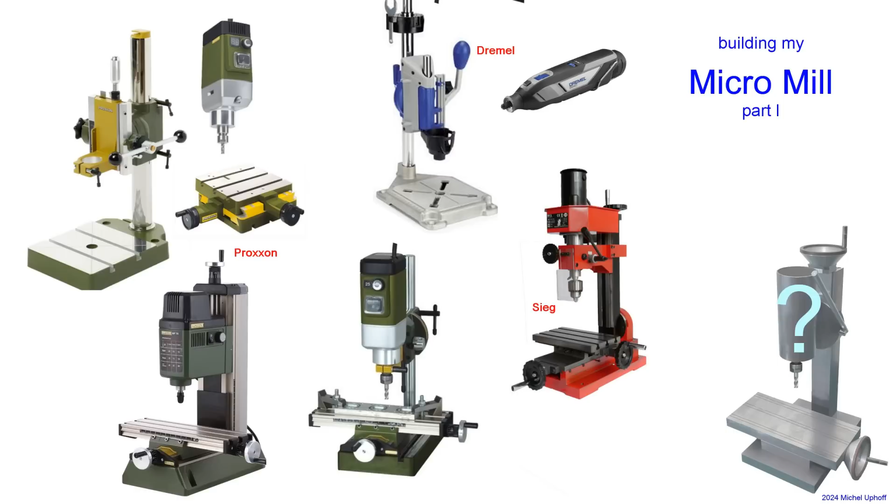In this new series of videos, I will be reporting on the development and construction of a much-needed micromill, a larger project with potentially many pitfalls and obstacles. I hope you enjoy it.

This happens to me so often. I have to drill a hole of 0.5 mm diameter or work with a 2 mm carbide end mill. And then it is quite a struggle with that relatively clumsy big mini mill with a much too low RPM. Fortunately, it still works well here. But oh, how careful you have to be with the feed rate at such a much too low speed.

The 4000 RPM of my FF500 is much too slow for these tasks. 20,000 is more appropriate. This graph plots horizontally the diameter of a high-speed steel milling cutter or drill, and on the y-axis, the corresponding RPM for various materials. As we will see later, this is an important graph when choosing a micro-milling machine.

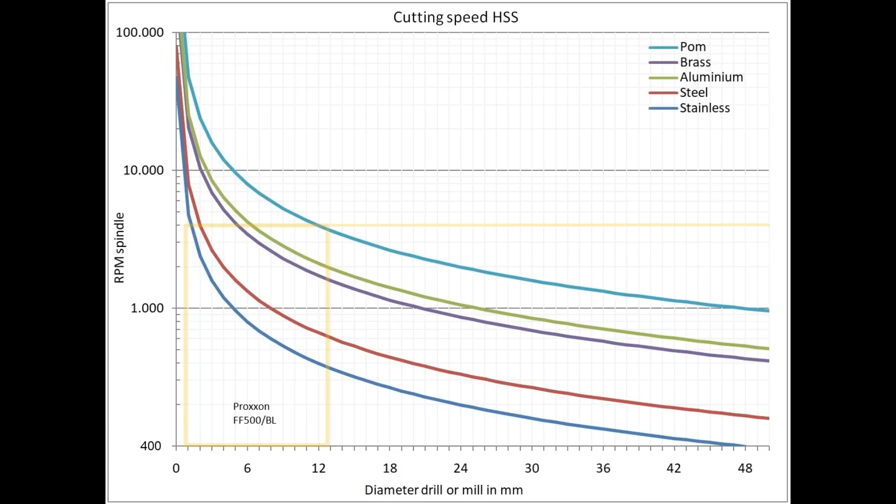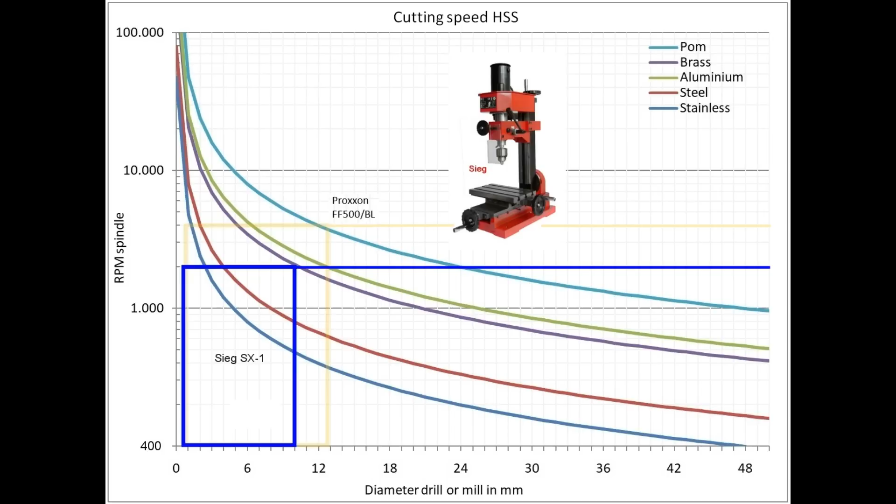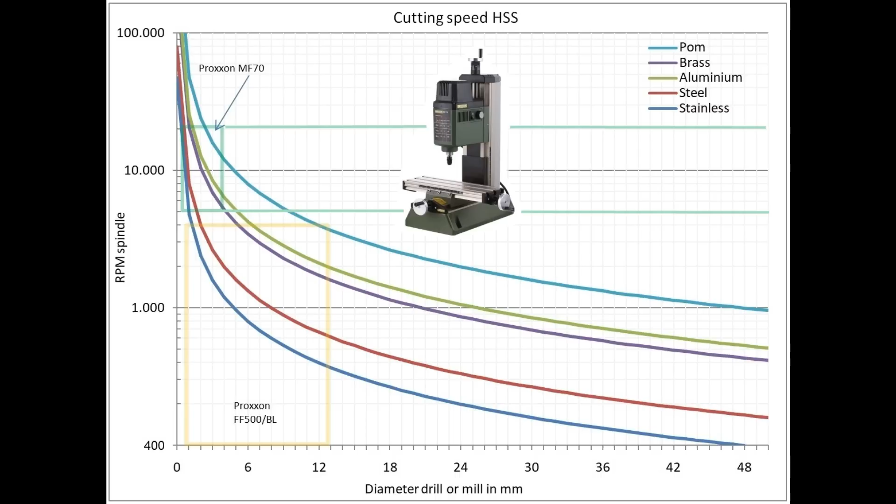So let me look for a micromill that complements my Proxxon as best as possible. This Sieg adds nothing and has a worryingly low maximum RPM for such a small machine. Of course, you can't avoid brands like Dremel and Proxxon. However, the Dremels are unsuitable for precise drilling and milling work. This MF70 from Proxxon was designed for just that. But the working range is so limited with 5,000 to 20,000 RPM and 0 to 3.2 mm clamping range that it doesn't have my preference.

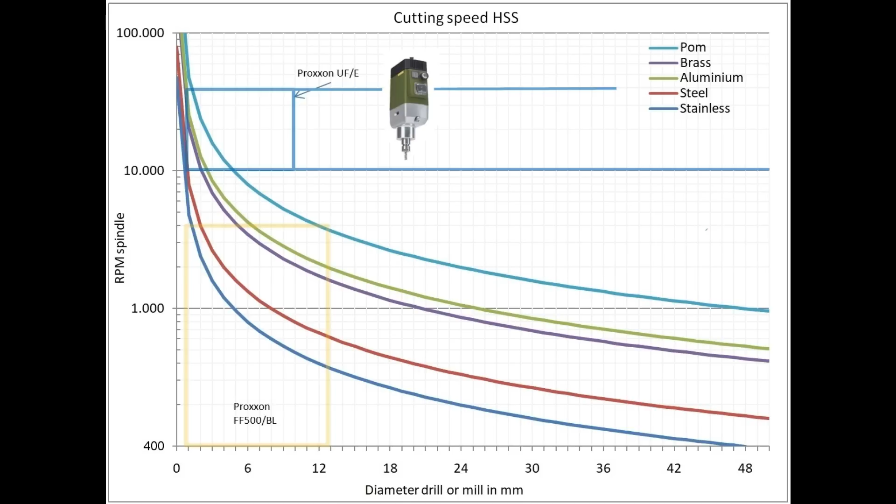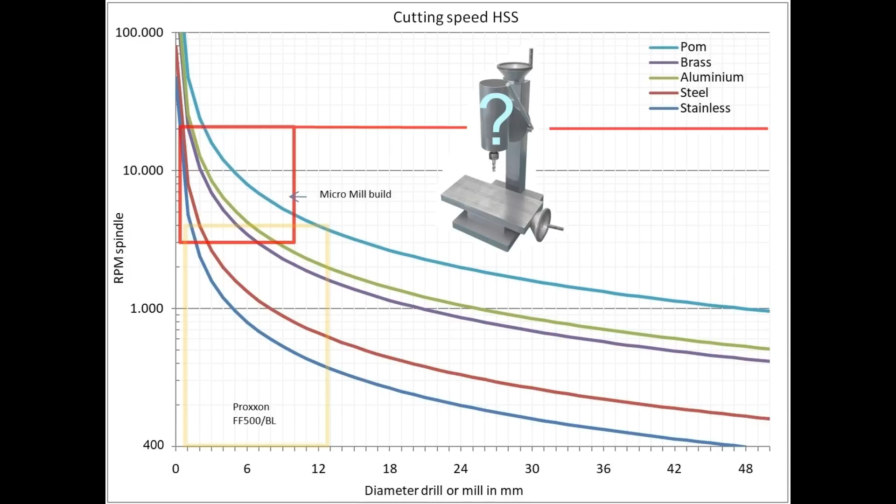This spindle from Proxxon has, in contrast to the MF70, a strong brushless motor with high torque at low speeds, but it is really a mystery to me why the lowest speed is at no less than 10,000 RPM. That limits the usability enormously in my opinion. This could be a nice additional work area. Anything between, say, 0.5 mm and 10 mm could be processed properly with such a machine, and the machine would then seamlessly complement my FF500.

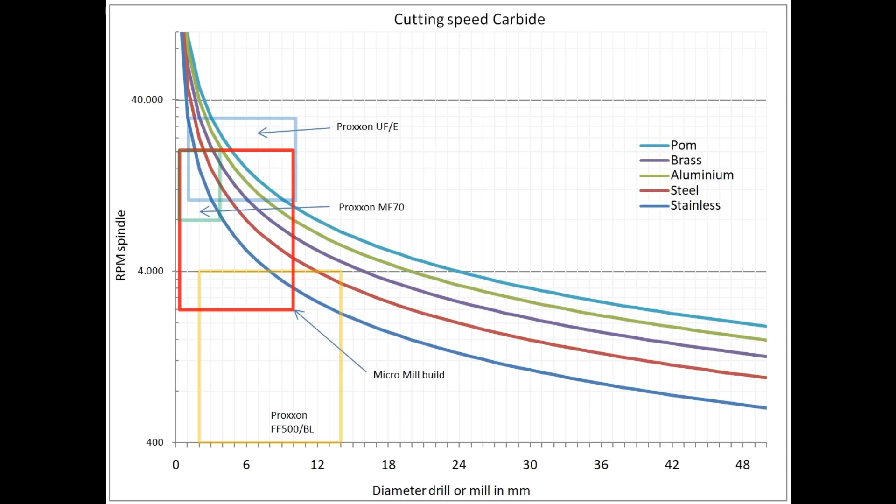I want it all. The Sieg is out of the question. With far too low RPM, it is not a real micromill. The Dremel meets almost none of the requirements. There is only a simple drill stand available for it. The MF70 has a cheap motor with far too little power at low speed, and does not meet other requirements like a swivel head either.

The UF/E can be supplemented with a column and a cross table, but that ridiculously high minimum speed and the lack of a vertical fine adjustment do not make me enthusiastic. Also, this machine with a column of 20 mm solid steel cannot really be called rigid. It flexes like crazy. And unfortunately, the much more expensive, sturdier combination from Proxxon does not really meet the requirements either. The same motor is used, so the same 10,000 RPM problem.

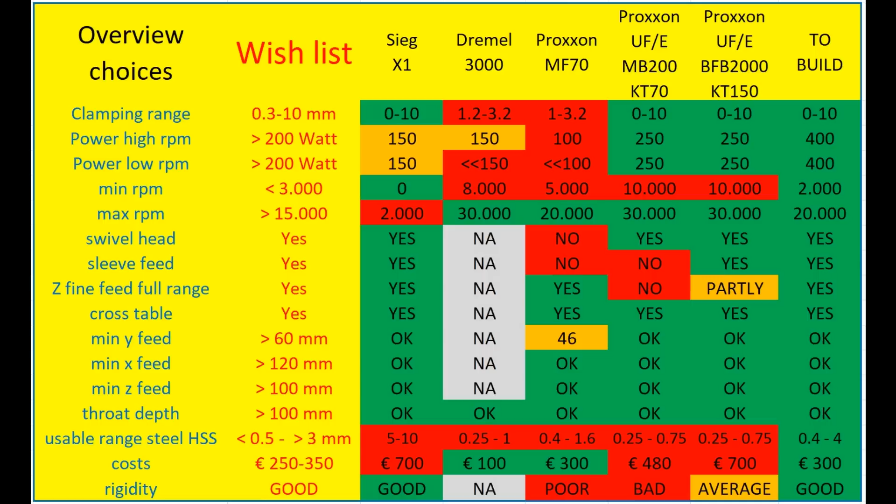The rigidity has been set by me to average because of a 43 mm hollow tube as a column. This column is about 3 times as flexible as the one planned in my own construction. Finally, the costs. I think I will manage to keep the entire budget for self-construction under €300.

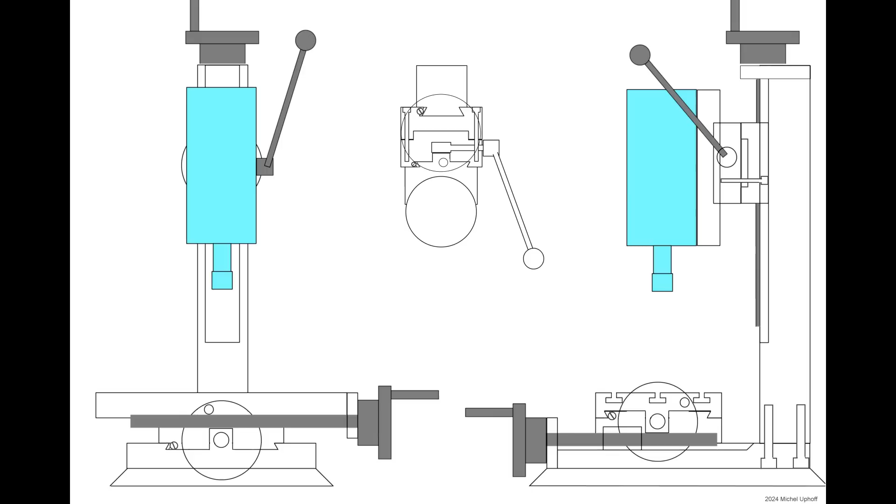Here is a first sketch of what I have in mind. Everything will be made of steel, preferably free-cutting steel. But this is just a first rough draft. During the construction, I will certainly make adjustments and add many details. I will probably also make a few mistakes and have to jump through some hoops. We will see. Let's get started.

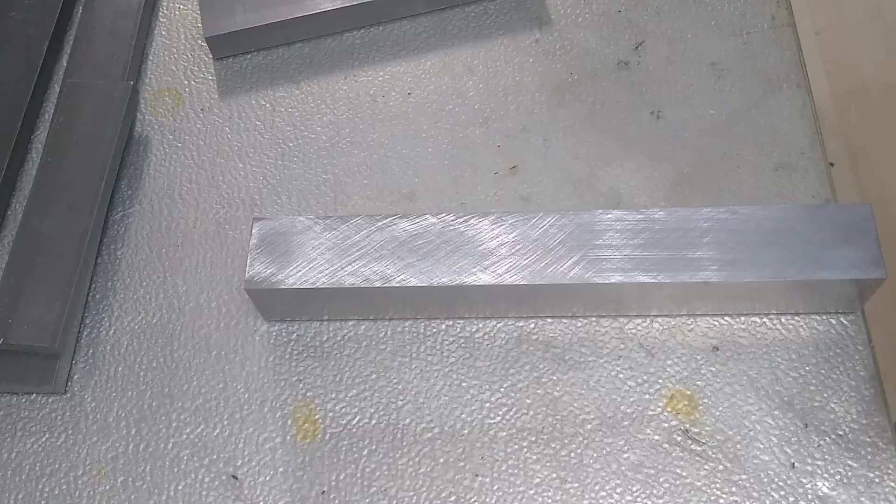Cold rolled steel, like this, has the advantage that it is fairly accurate to size, but it is less suitable for machining. We will see why later. For now, it is important that I have at least two reliable reference surfaces, which are completely perpendicular to each other. Of course, this slender milling cutter bends a little, even with very shallow cutting depth. That is why I will later take away 1/10 of a millimeter or so in several passes with a T-slot mill.

The material for the column is nicely square and equally thick everywhere, but the surfaces are very slightly convex. The reference surface is made very flat with cross strokes from a good file.

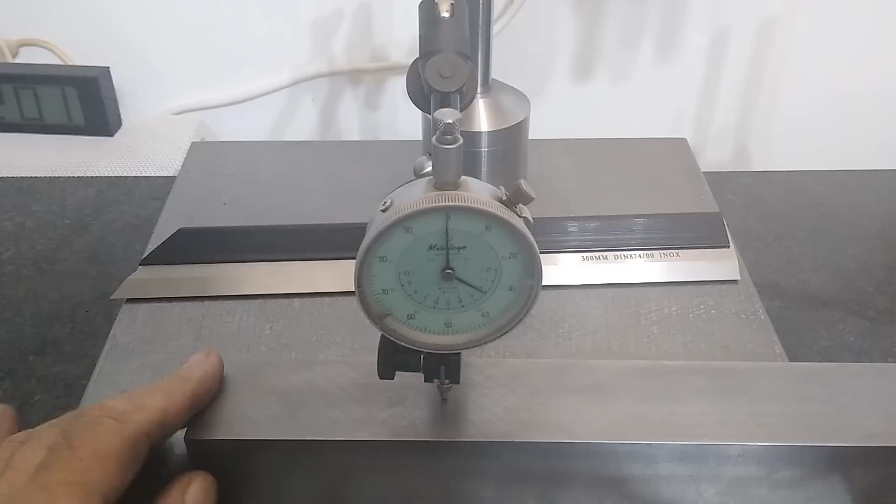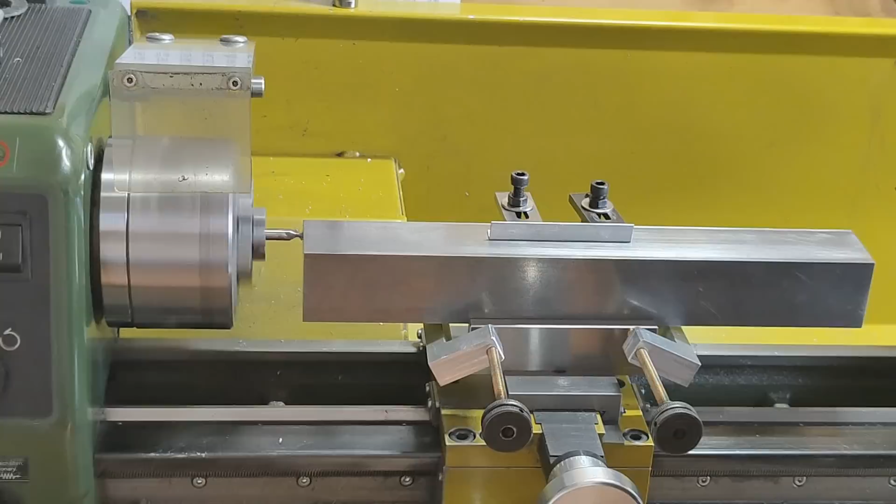How do you accurately drill screw holes in a column that is way too long for the mill? Once again, the lathe comes to the rescue.

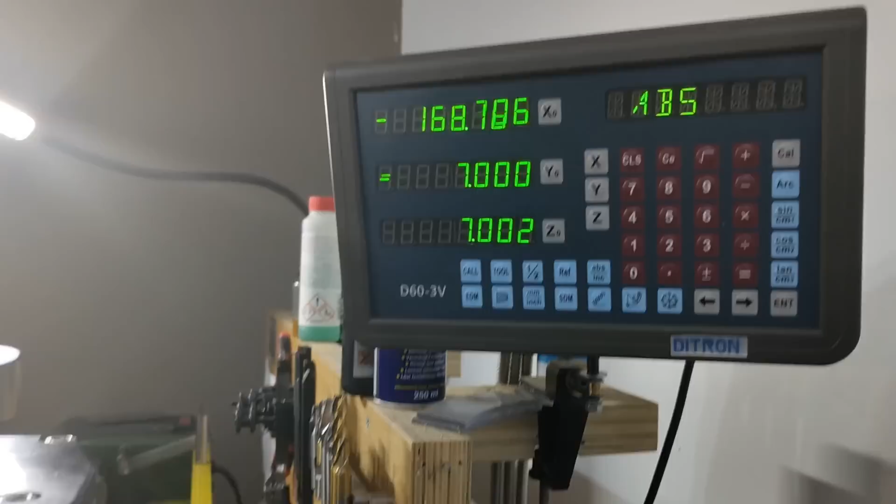I have a precision furnace that can anneal steel, but these larger pieces won't fit in it. So I'm going to have to get a little creative here. This is the tricky part. That cold rolled steel has been given a lot of tension during rolling. As long as it is not significantly processed afterwards, it does not cause any problems. But especially with significant processing on only one side, the steel will bend and the side where most of the material has been removed will bulge.

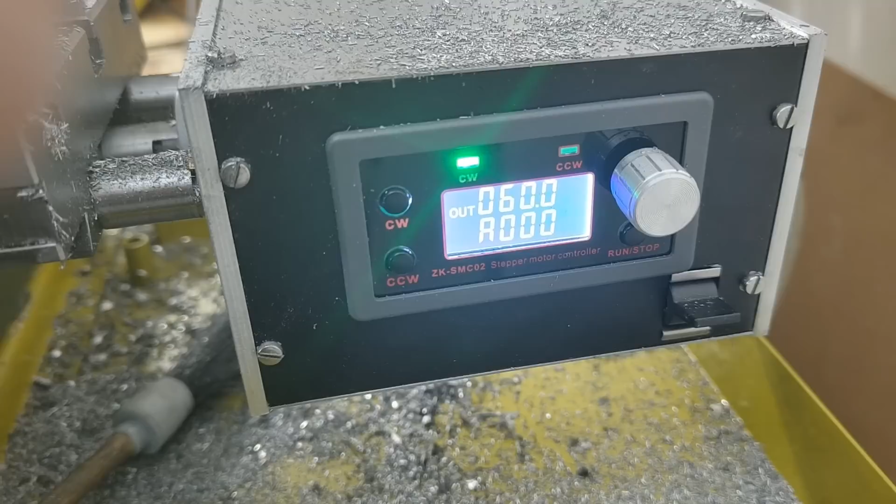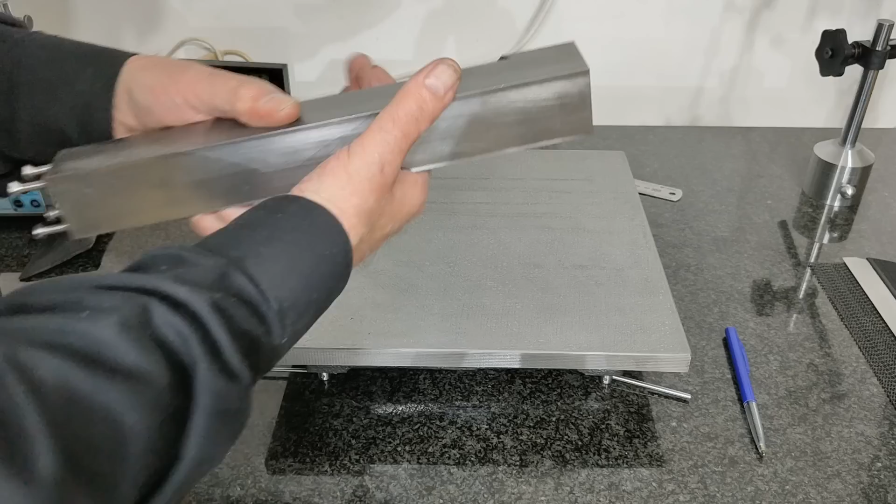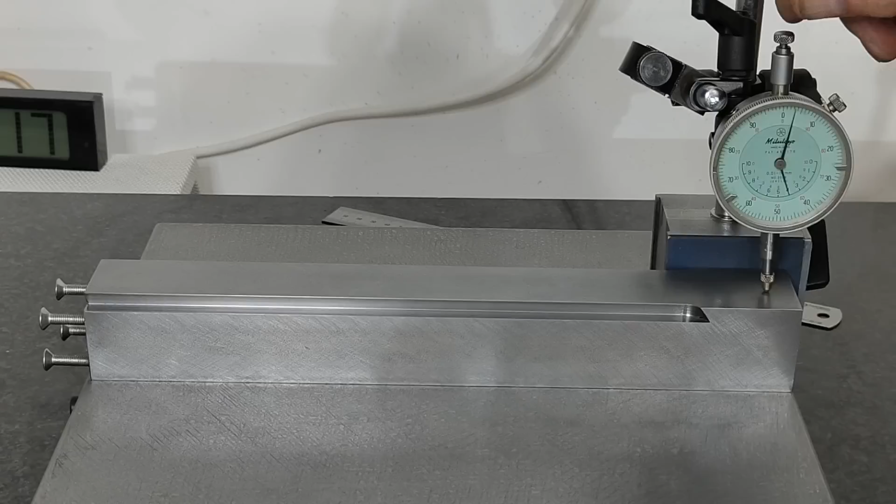And with the milling of two 8 mm deep dovetails over almost the entire length and on only one side, I can bet on the reference plane being warped. That is why I put the column for the last pass between vices, hopefully without adding tension to that warped surface. Indeed, that is convex. The steel has risen 45 microns in the middle. But fortunately, the trick of reclamping without tension for the last pass seems to have worked well. The running surfaces of the dovetail are nice and straight.

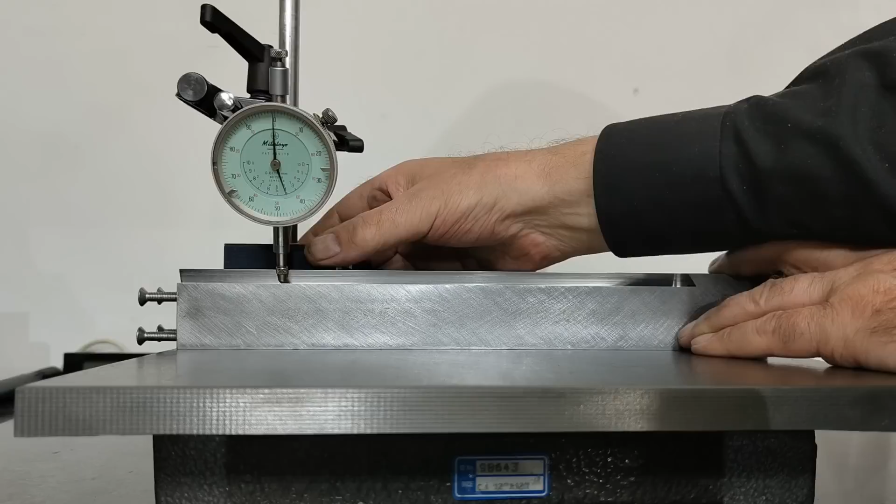That's it for this time. Next video, I will of course continue with this project.